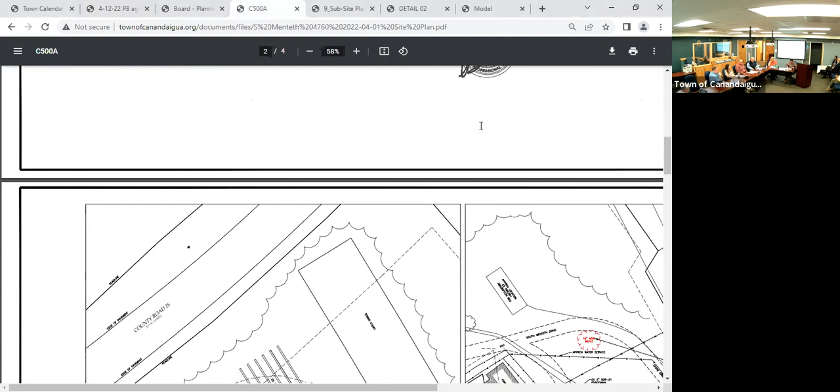This evening we have 2 new public hearings, advertised in the Daily Messenger on April 5th in accordance with the local law, so they've been duly advertised. The first application is a continued site plan from Marks Engineering representing Quisisana Trust, owners of property at 4760 South Menteth Drive. They are requesting a single stage site plan approval for a tear down and rebuild of the cottage.

We did look at this at our last meeting, and Sarah Linda was good enough to give us permission to extend it to tonight so that some wrinkles could be ironed out. I think from what we hear you were successful, so do you want to give us an update as to where we stand? Sure, thank you.

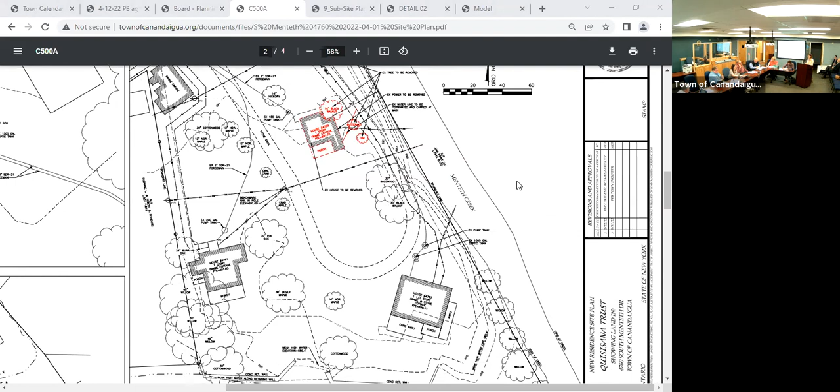At our last meeting 2 weeks ago, I believe the only matter still of concern was the driveway. Lance in his review had identified that the driveway, because of its length and width and difficulties with fire access, needed some work. So we agreed to take that back to our engineers and work with Chris Jensen to come up with something compliant as far as he was concerned. We've got a set of revised drawings here showing the turnaround at the end of the driveway, a widened driveway, and the turnout, which was the third item identified. So I believe we are in compliance.

The driveway towards the back of the circle is going to become quite a lot more conspicuous than it is now, so it's something we'll have to get used to, but there shouldn't be any doubt about the ability of fire trucks to get in there and do their job. Any other questions I'd be glad to answer, and Brennan is here also if there's anything about the rest of the project.

I think as far as the board's sake, that was the primary issue, and I think what we've gotten from Chris in collaboration with Lance, we can move forward. I don't think anything else has come up.

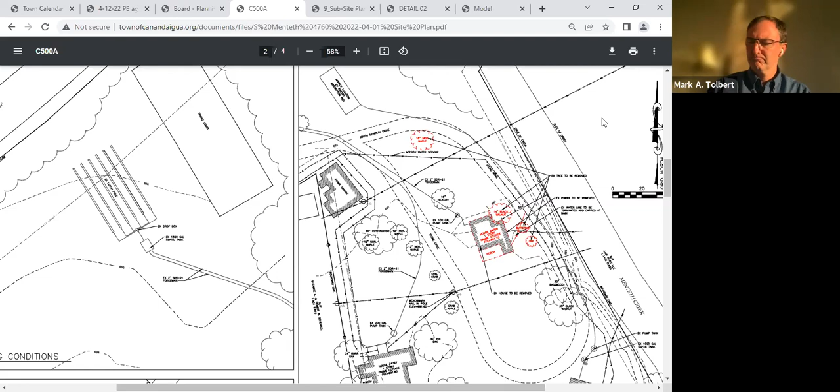Is there any discussion? If not, all in favor? Aye. Aye. Okay, thank you. Motion passed. Thanks for coming back. Always good to see you.

All right, we're going to move on to our public hearings. First one being CPN 22012, Marks Engineering representing ATL Contractors, owner of property at 3535 State Route 364, seeking preliminary subdivision approval to subdivide 33.18 acres into 31 single-family lots ranging from 0.46 acres to 2.74 acres.

I will open the hearing, realizing that we're still in the review period for the SEQR designation, the lead agency. So we agreed that we could go ahead and open the hearing and start discussion and get the board and the public familiar with the application, so we don't lose any time in that regard. So this evening we'll ask the applicant to make a presentation.

Lance has submitted a response or review letter, which I think we all saw was rather extensive, very thorough. Maybe some of those issues to be discussed. Certainly we'll open it up to the public for any comments they may have regarding the application. And then any questions from the board regarding where we stand. We're looking at a continuation of the hearing to a subsequent meeting once the SEQR time has run out and we're ready to move forward. So depending on what happens tonight, that will determine when the continuation would occur. Is that clear to everybody?

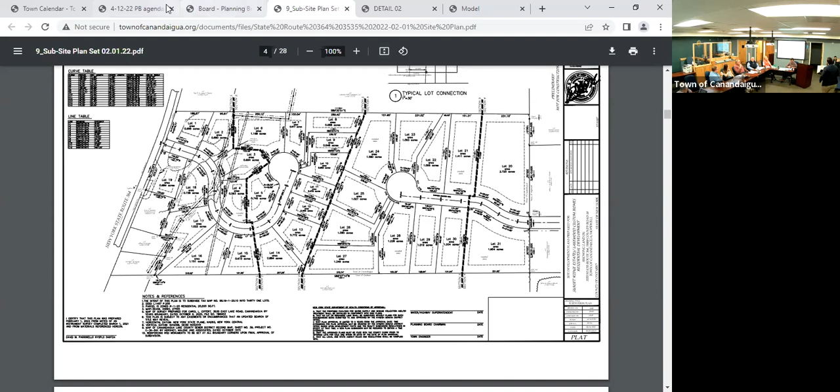What we're going to do - okay, so I'll ask the applicant, Sal, Bren, whoever is taking the lead on this, we have a presentation.

Which number was it again? 20. It's 2012. Wow. So what do you want? Down.

No, they sent a presentation at Michelle. I don't see it out there. It is. Can you check the M drive? Do you have access to the M drive?

It's trying to work really hard in a lot of these graphics. It'd be a shame if we didn't get the ball. You should not see them. Yeah.

Go to... down... to the right. He's on paper. This is a challenge for me to see. So, yep, I know I wouldn't be able to. Projects, yep, and then go down to 12. I can't read that from here. It's 12, right? Yep, keep going.

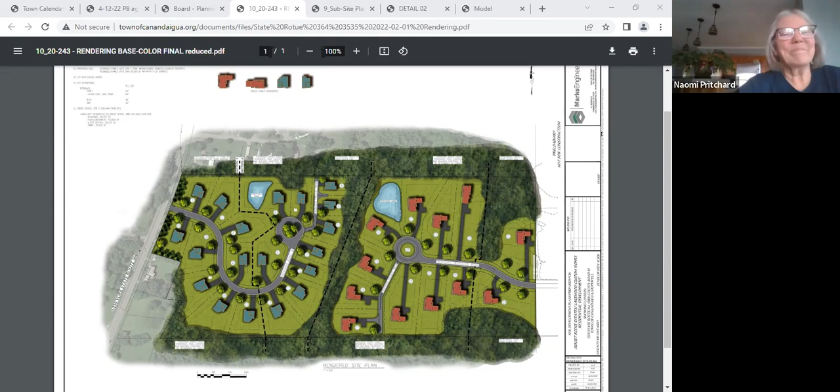All righty. Anyone else regarding this application? Okay, well, anybody else on the board have any comments before we continue?

Okay, so I guess to sort of wrap things up, you're going to take Lance's comments, you're going to take the comments heard this evening. Sal, you're going to work on some of the legal aspects of how we can protect both the steep slopes as well as the maintenance of the ponds, the issues on that. And...

Regarding the private driveways, how did you want that handled, Chris? I didn't realize you guys had already submitted something. Okay, before I take a look at them, just make sure they cover who's gonna do what and who's gonna pay for what and how it's managed. Essentially, the way I look at these, you gotta create a mini HOA - this is how we make decisions. Maybe that's what it already is.

Chris, does our code address private driveways at all? That's no problem, not to my recollection - not a private road, private driveway, sharing, a common drive.

The planning board addresses them by making sure they have good shared access and shared use agreements to say this is who pays for what and this is how we make decisions. In my past, I've been familiar with cases where good friendly neighbors have become enemies over common driveways.

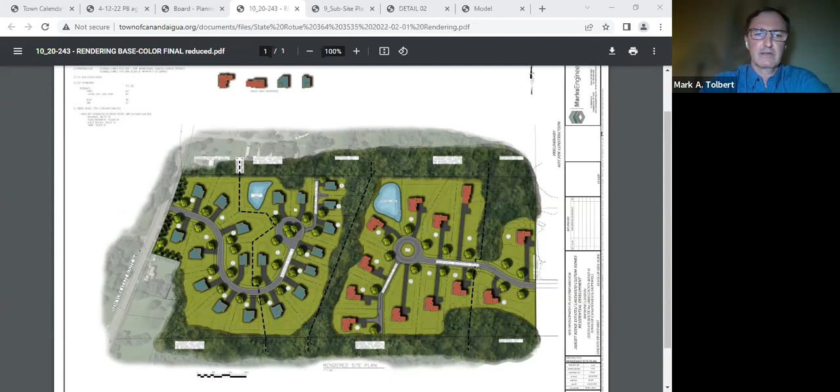I've got a kind of a solution. Go ahead. It is prior to issuance of a building permit that the planning board chairman has the opportunity to review the building plans architecturally for the building permit.

Before a building permit? Because we're not providing architectural plans for us, right? Not till the time of building. Right, so the owner selects what they're going to build, which changes inevitably.

The code enforcement officer, yeah, I was thinking the code enforcement officer. Right, he'll know which areas are. We can make sure he's absolutely capable of doing that. That's why I was offering it up to the chairman. I think that's a great idea, because the chairman of the planning board knows the intent of the SVO. Well, and the staff does too. Yeah, they probably know it better than I do. I would rely on the CEO and the town planner to review that, okay.

I think we're ready to move on and continue this discussion on this application. Let's pick a date, folks. We also talked about resubmission if it was possible by April 26th.

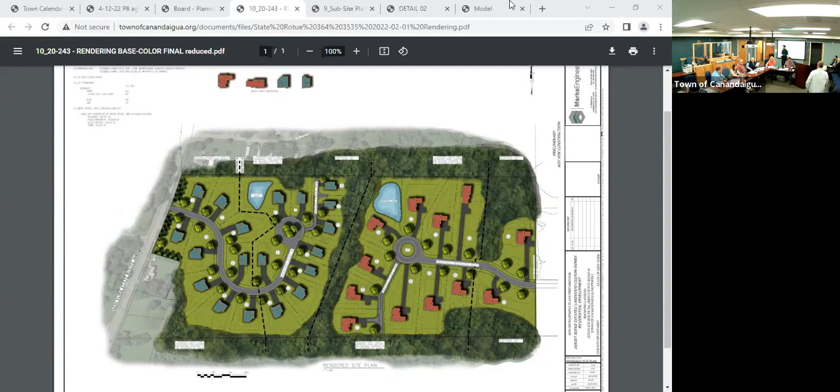All righty, our next public hearing is CPN 22017, BME Associates representing Christine.

Morning, guys. Owners of properties 32-15, 32-17, 32-19, all the way through to 32-27 East Cedar Bush want to amend their subdivision and get site plan approval for 7 existing lots, amending it down to 4 lots. Good evening, I'm Ryan Destro from BME Associates.

Here with me tonight is Chris Iverson from Chrysanthemum Incorporated. We are here tonight seeking approval to modify a previously approved subdivision and site plan for phase 3, shown in the upper left corner, the northwest portion of the property, representing the lots right here.

Phase 3 was filed with the Ontario County Clerk's Office in 1985 for 7 lots. It represents the final phase of development approved currently for the Quail Bush development, and since 1985 no development has commenced within the phase 3 area. Based on current market demands, we're looking to reduce it from 7 lots to 4 lots to eliminate the middle units, which are not as popular.

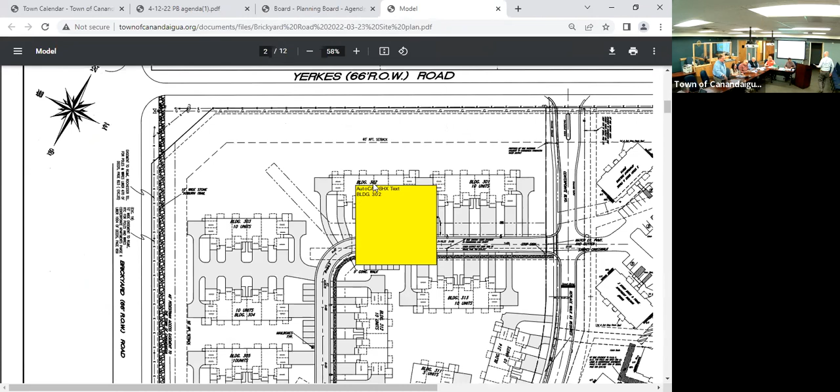We are looking at a site plan for McMahon LaRue, representing Morgan Spoleta, owners of property at a yet to be determined address on Brickyard Road, requesting final site plan approval for the construction of 10-unit buildings and 3 five-unit buildings for a total of 115 units.

Greg McMahon with McMahon LaRue, 822 Holt Road, Webster, New York. I thought maybe to start out, since most of the board members are new to this project, I'd give a couple minutes of history.

Back in May of 1998, we received approval for what was called phase 2 and phase 3 of the CenterPointe Apartments. At that time, all of this property was owned by the Farash Corporation. Phase 2 is the development just to the right on that drawing. Farish built 8-unit, basically brick and vinyl buildings.

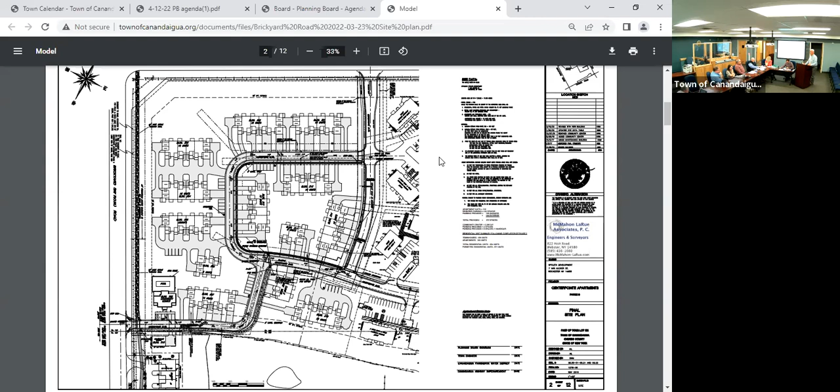And we had phase 3, which is the corner parcel, also approved with the same units. I believe there was about 128 units at the time Farish had that. They built and put in all of the utilities for phase 2 and phase 3. They built the buildings in phase 2, and at that point they stopped. They did all the grading in phase 3, and stopped construction because the market for apartments didn't justify building those buildings.

It sat for a long time. Max Farash passed away. Properties were sold. We came back in July of 2017.

with a new layout for phase 3 - 115 units, 9-unit buildings in various configurations. Some had garages, some did not. There was a community center at that time located up near Yerkes, in the northerly portion of the property.

That was approved in July of 2017. Subsequently it got several extensions. Plans were signed, I think SWPPPs and everything were prepared. At that time that was being developed by Morgan, but for whatever issues they never proceeded with it. Now we come to the present day.

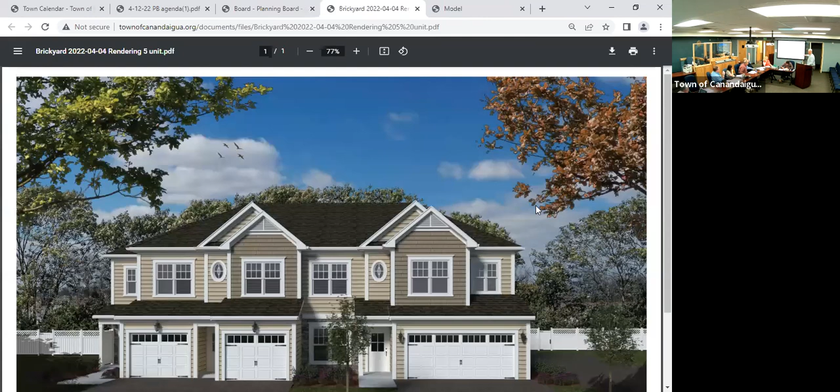I don't know if these made it to the screen - yes, they're there. There are coach lights shown on the rendering, for either the 10 or the 5 unit building, both of them, either one. That's the 5-unit building, and you can see there are typical residential coach lights on the buildings, but that would be the main source of lighting.

No street lights around the building. Phase 2 - on the roadway there will be. This is a private road, it's not dedicated, this is part of the complex. Even though originally all of this was owned by the Farash Corporation, over subsequent years this phase of the apartments is going to be owned by a separate entity from who owns the existing apartments right now.

Is the entrance for the 2 units around the side? Yes, there's actually a garage on one side of the building. On the 10-unit building there are garages on both ends. That's nice. But on the 5-unit it's just the one.

And these are for sale and also rental? Just rental. Do you know the price point for these? I don't - I was hoping somebody'd be here from Spoleta tonight. I'm not sure what happened, but they specifically went with this as a higher end unit, so I think your rental prices on these are going to be significantly above what they might currently be on the remaining apartments there. These are with the garages and...

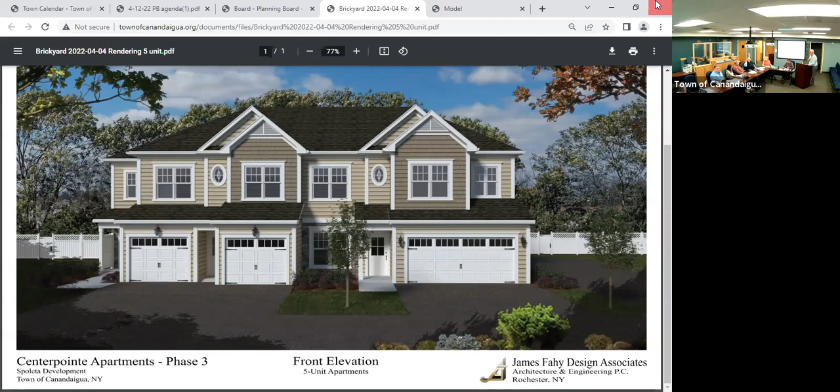Did I miss the landscaping plan? It's in the package, it's in the site plan. We'll go back to the site plans - scroll down toward the end, 23, okay. Yep, I missed that - scroll down, I've got it.

I'm just looking through the site plan on the section that has the Auburn Trail on it. You mentioned there's no intent for lighting along that - as you go south from there the trail continues, I guess it's probably indirect lighting happening. If you look along Brickyard Road with the pool access and everything, you're going to have a lighted area up to Center Point Boulevard, coming from the south up. There wasn't anything in the plan for continuing lighting on the Auburn Trail up to there. No intent to light the Auburn Trail - there is lighting on Center Point Boulevard at the intersection, and as you go south along the townhouses there is some roadway lighting that would happen to cast light on sections of the Auburn Trail.

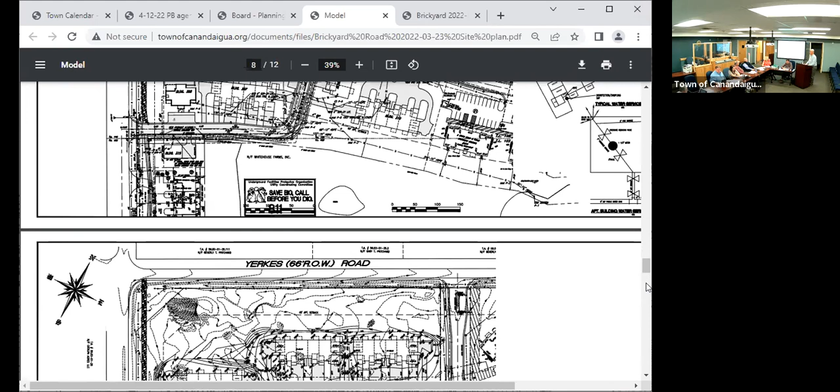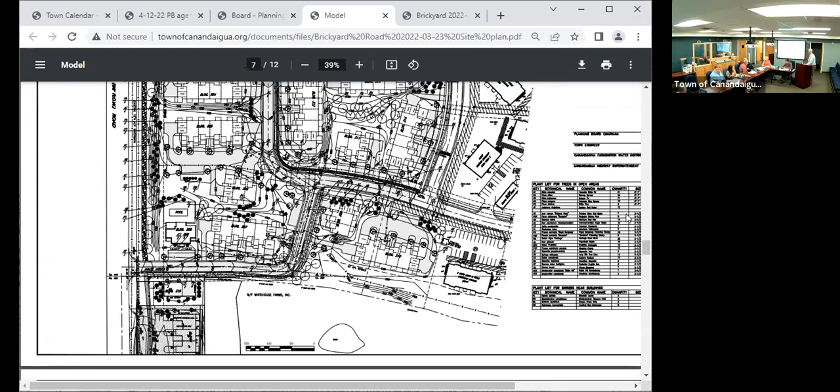Keep going. You would go up, it's this one. Yeah, right, next one up. There it is, oh yes. January or the March? We're going to hold it to that landscape. I didn't expect any less.

The truck's going to go out, it'll be placed where you sign it, so once I sign it - that's what was required. It's basically the same thing that was in the 2017 approval. Other than with the newer buildings, we had to tweak things a little bit.

And I see you've added some guest parking. Yes, we did, from the 2018 plan we actually upped the parking from what was originally approved. The requirement is 230 spaces for 115 units. We've got 128 garage spaces and 144 exterior spaces for a total of 272. So 230 required, we've got 272 - we did try to provide for some additional guest and overflow parking.

As with the other apartments, since these are all rentals, they're restricted. There's no RV storage, there's no boat storage. They're very strict - there's no exterior storage of items.

What about garbage? Garbage or totes - oh, so they do individual totes. Okay, so with each unit having a garage, they will keep their tote inside and then just put it out on the appropriate collection day.

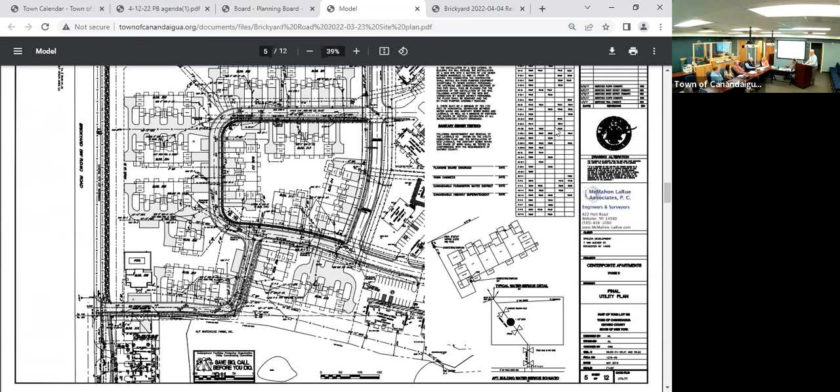Back in one of the, I think it was the 2018 or 17 version, the school district came back and talked about a bus pickup spot. I don't recall if they specifically identified a location or not. So is it possible that the community center will be used as the pickup and drop off spot?

More than likely. When we did the apartments up on Buffalo Street, it was basically a lot of private drives in there, and when the school district came back, they wanted the pickup solely at the community center - it's not a long walk, there are sidewalks through the development. So one of the conditions I've provided to the board for your consideration is that the plans be updated to identify that off-street pickup and drop off location, whatever that may be.

Yeah, okay, you want to add the playground as a condition? I don't know where they'd put it, other than the infield area there, but that's kind of based in the center of the circle.

They are painting parking - they painted parking. Maybe that's what I was thinking. And they have room outside the pool. Put something down there for a second - that's actually not a bad idea. The pool, yeah, I think if I'm correct, the other community center that serves phase 1 and phase 2 has a small playground near the pool.

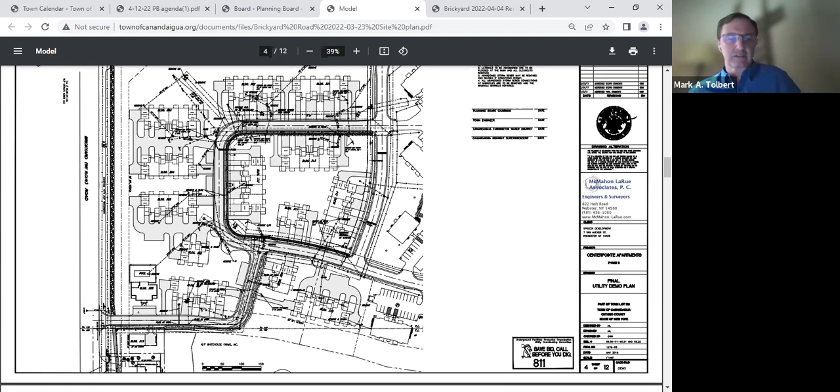Any concerns? Chuck, just something I was looking through the archives and reviewing this one: was there a traffic study done on the project when it was created some 3 decades ago? I believe there was one done as part of the creation of the PUD, but I don't recall what it said at that point in time.

It was probably based on the 500. Right, but the number of units hasn't changed from that original approval. Right, which was authorized then and reauthorized, I think, 3 more times since then.

Each time we have to approve it, we have to go back and make sure it's in conformance with the PUD, which I believe at that point in time considered all of those environmental impacts, including the traffic. Okay, I just didn't know if that would have potentially. Did you take into consideration the environmental impact on the wildlife in our area?

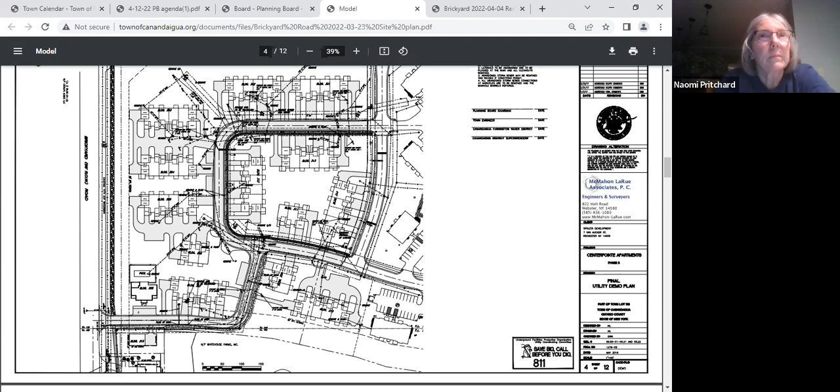As part of the environmental review, SEQR would have addressed that at the time when they completed it. I think it was done in the 80s or 90s. I believe it was 1983 or '86, there was an environmental impact statement, a full EIS done at that time. For a PUD, you would typically do a full EIS. Right, because that's what we zoned. Right, which was a farce.

Okay, anybody else? Ready to move on? SEQR was handled back in 1986, so we're okay there. Let's move on to consideration of a final site plan approval resolution.

I just want to add before we get too far - '86, yes, SEQR was done for the whole project, but each subsequent phase had an amended SEQR review associated with it. And then each adoption of the PUD standards since '86, up to I think 2015, has also considered the environmental aspects related to the project. So I don't want it to be perceived that the environmental impacts were only done once in 1986, because that's not completely accurate.

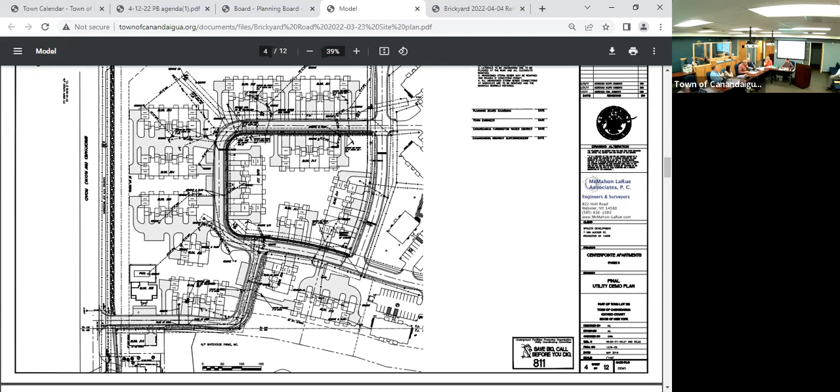Absolutely, so for some reason I'm thinking, but the timeline is still up in the air. I don't know if we referenced the connectivity - when does the other portion gonna be constructed? Right, so right now they're required as part of this, once they start to build it, prior to the closing of the project. So it'd be prior to the last CO that's issued that this would all have to be constructed.

Maybe we should put that - you're suggesting it be done possibly before building permits? Prior to issuance of building permits? That might be too premature. Okay.

I just didn't want this to go on forever. The Auburn Trail needs to go in before the landscaping, which is the right approach since landscaping is the last thing you do. If it's done in winter months, you're not doing spring landscaping, so the Auburn Trail has to be in for the landscaping.

Well, maybe with the landscaping bond, can we? The bond, the letter of credit that will be on file will have a dollar amount associated with this construction that we wouldn't authorize release until it was constructed either. Could we add that into that surety? This will be in there. Okay, it has to be a part of that.

I'm just trying to make sure I capture this, because regardless of what we do, this would have to be constructed before we release the surety, before the town takes dedication of any infrastructure. They would want all this stuff done prior to closing of the project. Yes, that part is a must. That's already built into our process.

So the question, I think, is if we are concerned with the timing, do we want to push that up? Is there a need to have it done before whenever that date comes? There absolutely could be. And what would that be contingent on? When the Auburn Trail is being built?